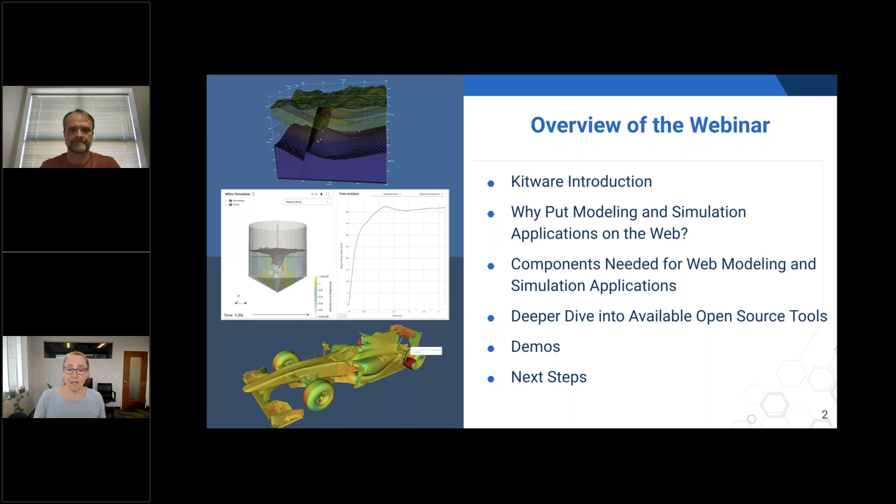So Kitware is a software and AI research and development company. We have about 200 employees, across our offices here in the US and over in Europe. We've been around since 1998, and we are committed to open source and open science. We're proud to be a 100% employee-owned company. We're also a highly collaborative company.

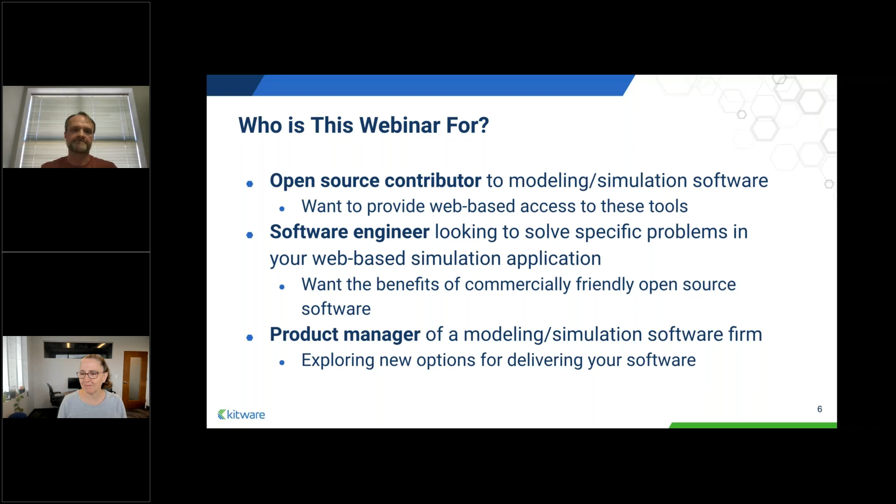First, I want to start by telling you what I mean by modeling and simulation. I'm using these words, which are overloaded quite frequently, in the context of running computer software that models some kind of physical phenomenon in the real world. By modeling, I mean the creation of data structures, such as meshes that are needed to discretize the mathematical model that describes the physical phenomenon, then the definition of parameters that might also govern that phenomenon. By simulation, I mean the process of computing the modeled phenomenon in a way that produces data that reveals how that physical phenomenon has evolved.

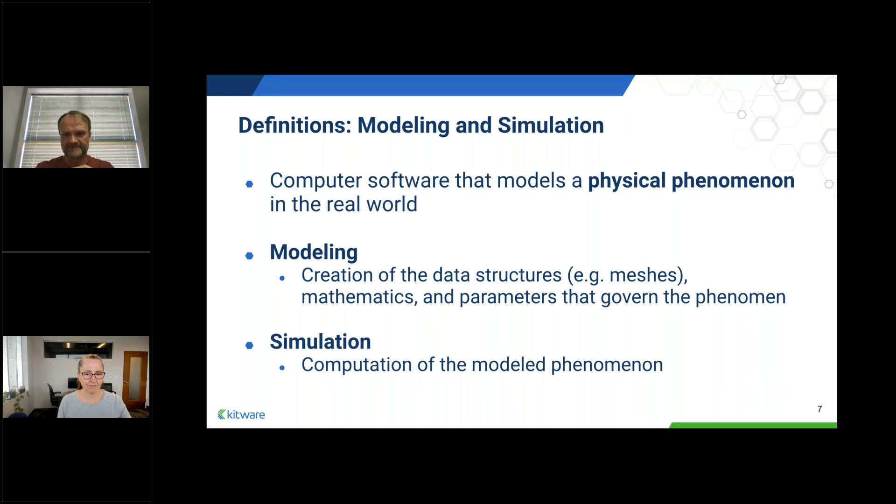So in practice, modeling and simulation is carried out as part of a workflow. This is just one example of a modeling and simulation workflow. On the left, we have model creation and domain definition.

This can involve creation of geometry that represents some physical objects in the world, as well as an embedding in which those objects interact with some external components. For example, we might have a model of an airplane wing that interacts with a volume of air flowing around it. To the right of that, we have discretization or meshing.

In many simulations, this step is critical for getting accurate results.

Third in line, we have parameter specification, which is where you specify input parameters that affect the evolution of the physical phenomenon. This might involve, for example, setting boundary conditions or defining things like Reynolds number in a computational fluid dynamics simulation.

Once everything is set up in terms of having a mesh, if it's required, and the model parameters are set, the simulation process can begin. This is the actual computation of the model and the simulation results that we are running.

Finally, to understand the result of the simulation, we have a post-processing step that involves analysis and visualization of the data that's been generated by the simulation.

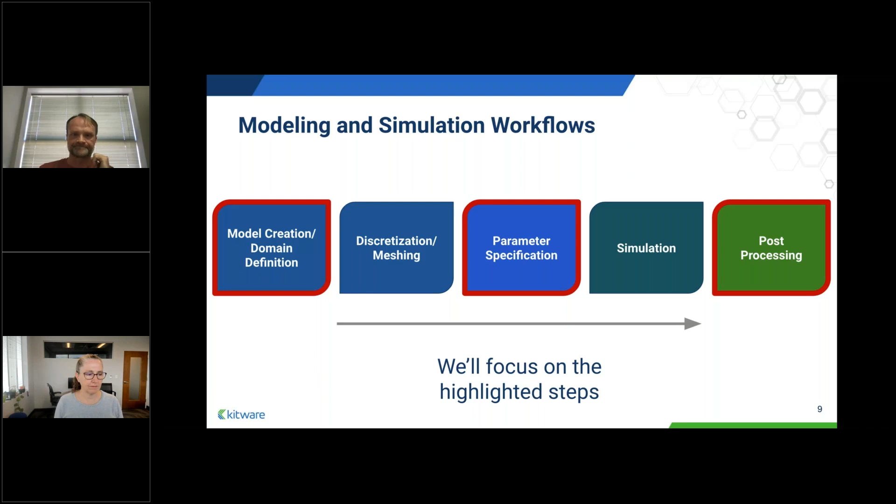So when I say, or what the title of this talk is about, making modeling and simulation widely available on the web, I want to clarify what I mean by that.

I'm not talking about a web application that is something like a remote desktop application or a thin client that simply provides a window into some remote system where the usual desktop software is installed.

Now that's a fine model and has plenty of benefits. In fact, a number of software simulation software providers offer such services, and they work well. But this is not the model I'm talking about today.

Instead, I want to talk about native web applications that are delivered from a web server to your web browser. Now, web browsers these days are very capable platforms for software application delivery. They offer advanced user interfaces that are as good as, and in some cases even better than, desktop applications.

You might be familiar with Microsoft's suite of Office applications that are available online. Adobe offers their tools such as Photoshop, Premiere, and Illustrator online as well. And this is a great platform to offer those tools that have historically been desktop applications.

You're probably familiar with other services that you use every month to do banking or pay bills. Those are all web applications with usually fairly nice interfaces. These days, there are a lot of software tools available that make it routine for web developers to build attractive user interfaces that are perfectly suited to what we're interested in here today, which is modeling and simulation applications.

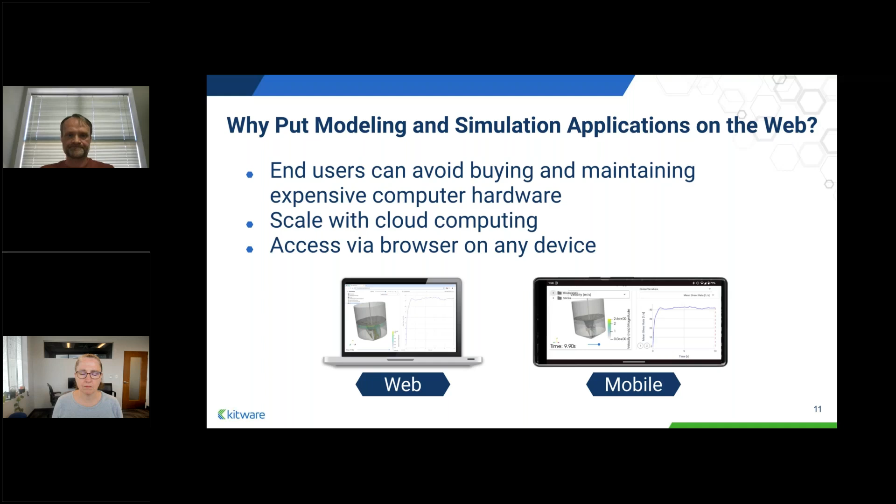There are a few additional reasons to put modeling and simulation applications on the web. Often simulation software consists of an ecosystem of very different executables used together to produce that simulation workflow we saw earlier. These applications can be pretty complex to use by themselves, let alone in the sequence you need to produce simulation results successfully. So integrating them behind a single user-facing application that hides away those details just makes the software easier to use and increases the adoptability of your software by users.

Because people can connect to that simulation software from anywhere on the planet when it's on the web, having that available online also opens up possibilities for easy collaboration. For example, design teams from even different continents can log in to the same website and share models and simulation results among each other quickly and easily.

Putting simulation software online also opens doors to non-expert users who are unlikely to have access to a workstation where traditional desktop modeling and simulation applications would usually be installed. You can even go one step further and make it possible for computational scientists to create curated simulations that have only a few exposed parameters that are meaningful to end users who have other expertise, not necessarily computational modelers. I'll demonstrate such an application a little bit later on. The value of doing this is that it has a multiplicative effect on the value provided by computational scientists within an organization, since they can delegate some of the more mundane but still necessary simulation tasks to others who weren't able to run simulation software easily before.

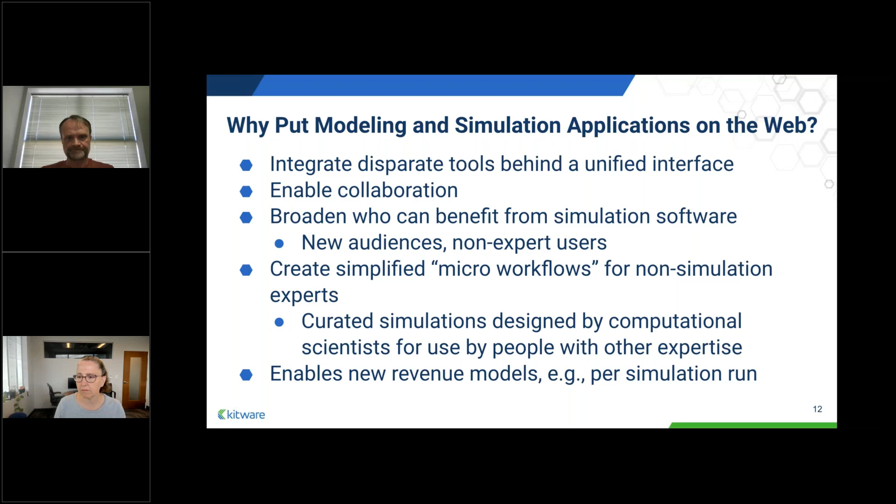So we saw earlier a depiction of one possible workflow for modeling and simulation. What are the components that we need to enable the creation of those workflows on the web?

So first, we need some kind of geometric modeling tools. This might consist of a database of predefined model geometries, or maybe simply text descriptions of a model geometry and how their different objects are related to each other in space, or even full-fledged CAD tools that let you interactively define input model geometry in 3D.

Second, we need some kind of user interface elements. These could include text fields to enter numbers, sliders to specify numbers within a range, checkboxes to turn options on and off, list trees, and so on. Things you would typically find in a simulation program. Web applications use these elements to set simulation input values, for example, in a web-based simulation app.

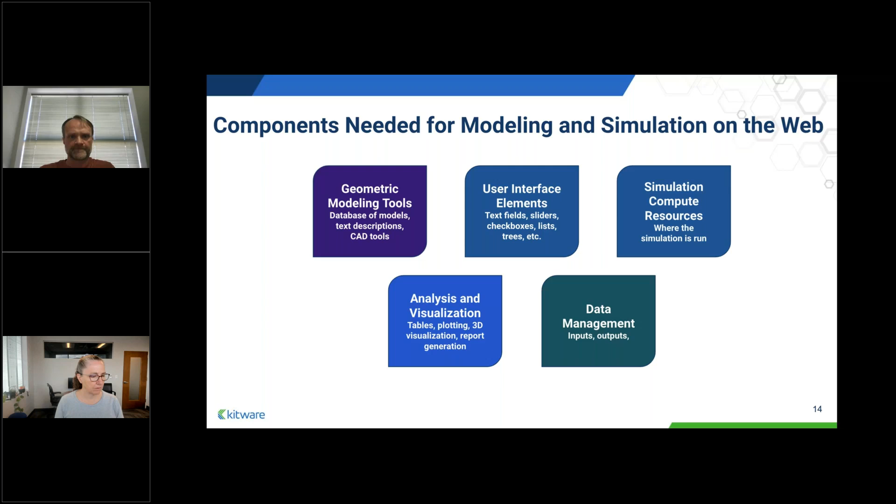Now, there are a lot of software packages available to help with the tasks I just described. As a company that specializes in open source software development and support, Kitware recognizes and promotes the value of using open source software to aid in the development of your web-based modeling and simulation applications. Many others do as well. Let me share a couple of reasons to use open source software.

First, open source software lets you jumpstart your application development. By satisfying a common software need with an existing open source library, you can focus on the value your software provides instead of reinventing the wheel. In addition, there are no costly licensing fees. A lot of open source software is licensed in a way that lets you use it in commercial offerings without owing any kind of licensing fee.

Open source software also helps you avoid vendor lock-in. While there's a labor investment required to use any open source software library, there are no other real financial considerations that have the effect of keeping you locked into using that software. You can freely swap it out for another open source library that does the same task.

Open source software also has the benefit that bug fixes and updates are contributed by others who use the software, and you benefit simply by updating for free when a new version comes out. You also have the option of contributing features and bug fixes back to the open source project so others can benefit. It's a real win-win situation.

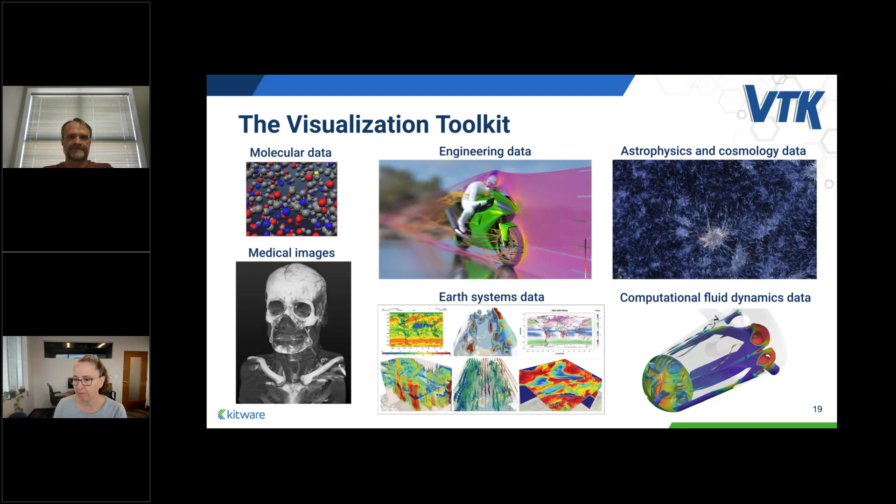VTK is a software toolkit for visualization. It's written in C++ and runs on Linux, Mac OS, and Windows. It also has language wrappings for Python, Java, and C#. VTK is open source and has a permissive BSD style license, which means it can be incorporated into commercial software products. VTK is able to work with several different user interface toolkits, including Qt, MFC, X11, macOS Cocoa, and several Java toolkits.

But wait, I just said VTK is a C++ library, and really it's intended for traditional desktop software. So how do you use it for visualization on the web? Well, there are two different approaches available at this time to use VTK in web applications. One is with the JavaScript library called VTK.js. The other is with VTK C++ code compiled to WebAssembly. We call the second approach VTK WASM, where WASM is an abbreviation of WebAssembly.

All right, so we have these two different approaches. What are the similarities and differences between them? Why do we have two different approaches?

Both are libraries that enable rich 3D visualization on the web. They provide similar functionality in terms of the core scientific visualization capabilities that they provide.

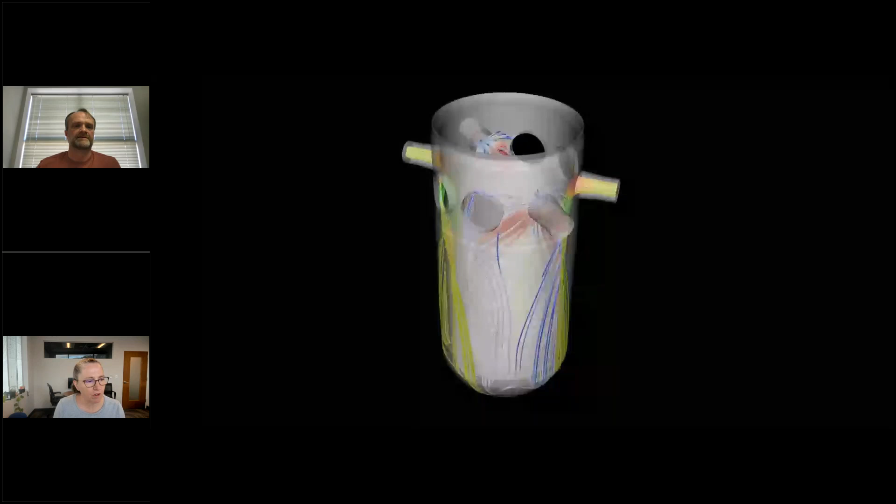Your demo might cover it, but I remind everybody that demos through a webinar interface sometimes seem choppy when they're perfectly smooth to Cory.

The question is, what kind of rendering performance could you expect to get out of a web browser? Most recently, we've been developing in the VTK WASM interface, which I'm talking about next, some optimizations that let you render tens of millions of polygons, 10 to 20 million polygons at interactive frame rates, so 15 to 30 frames per second.

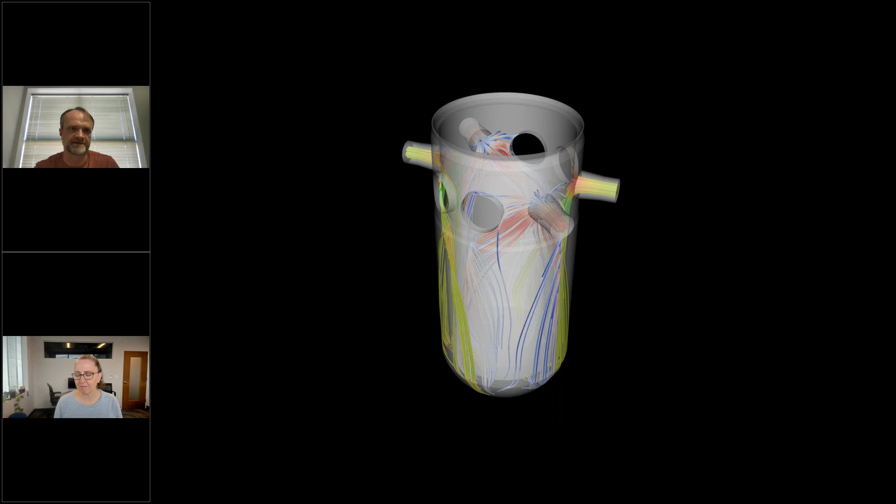One of the limitations we run into using that approach is, or has been until recently, a 32-bit memory address space. So you can often run out of memory before you run out of rendering performance or how many triangles you can render. That's been alleviated, and 64-bit address spaces are now available. So we can really push that. On the order of 20 million polygons at interactive rates is quite possible.

Thanks for that question.

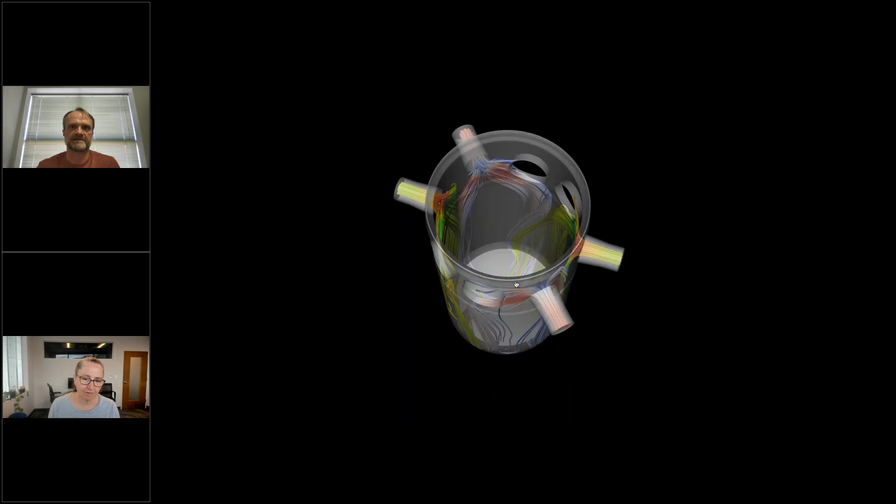Here is an example of a visualization. This is just pre-canned, not interactive other than I can slowly move it. This is very interactive on my system, but as Lisa mentioned, it's subject to compression and is a little bit less smooth on your side.

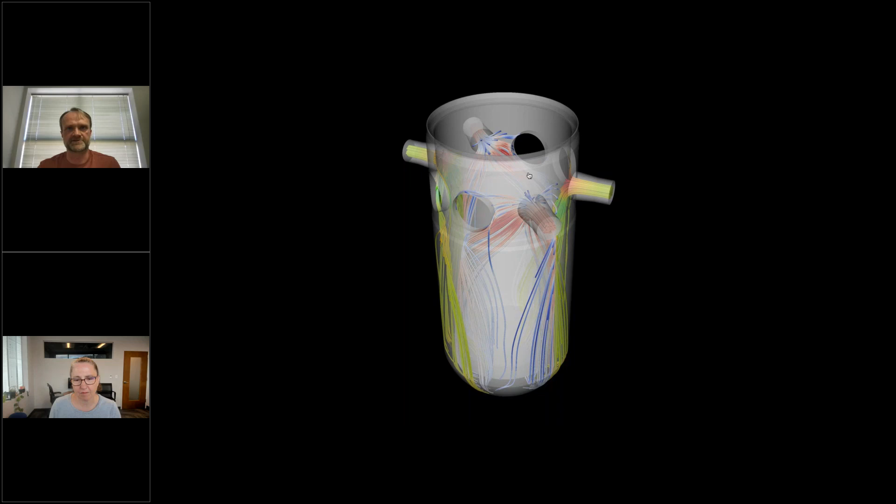But it basically shows a couple of things. We're showing geometry here in a mixing vessel application. This vessel is set to transparent, so you can see that transparent compositing is done in a correct order. We have pseudo coloring on these streamlines that are displayed here. So, classic example of scientific visualization here, and this is VTK.js.

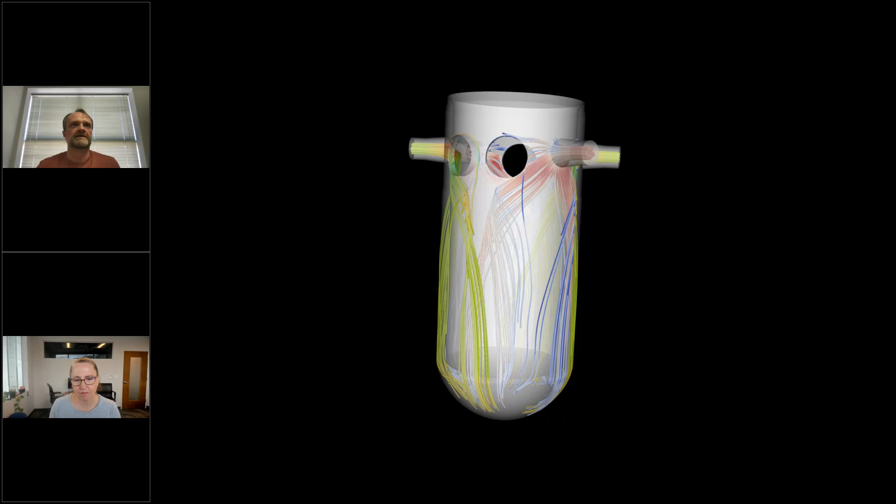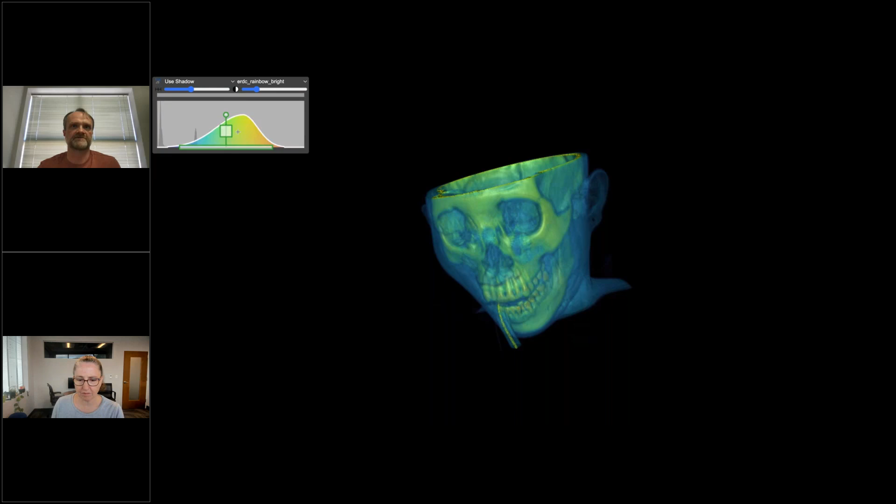Next, I'm going to show volume rendering. This is a medical data set. Volume rendering is a way that lets you see through 3D data. There's a transfer function, shown in the upper left here, that modifies how data values are mapped to both color and opacity. As I'm adjusting that, you can see the results. It might be a little subtle, but you can say focus more on bone than flesh as I move this transfer function around, and this is all happening and rendering very quickly.

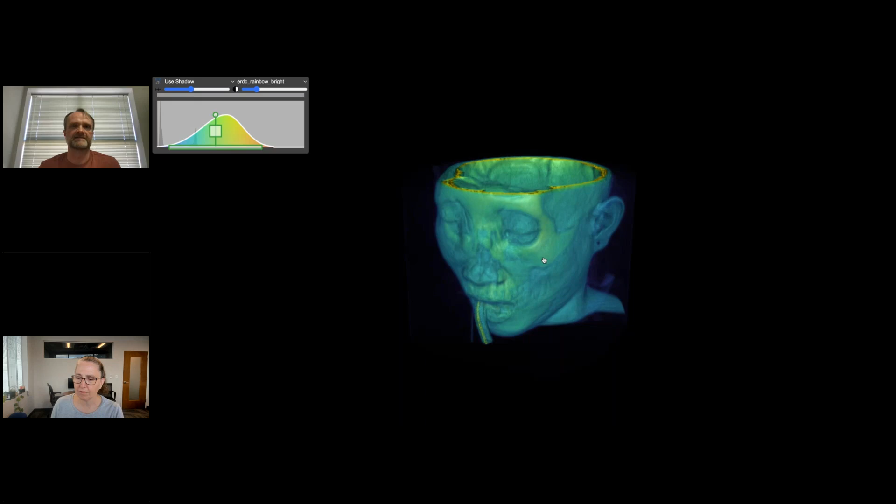This is a VTK.js volume renderer. I'm still, to this day, amazed to see this work so smoothly on web browsers, especially on my phone when I look at that. I never imagined the day when we'd have volume rendering on phones work just very smoothly. So that is a quick demo of a couple of the capabilities of VTK.js.

Next, I'm going to tell you about VTK WASM. VTK WASM consists of VTK components from the C++ VTK original library that are compiled into WebAssembly. Sorry, I've been saying WASM - WASM is just a shorter way to say WebAssembly. So this C++ VTK code is compiled into WebAssembly, which is a binary instruction format that can run in a virtual machine in your web browser.

Emscripten is the compiler toolchain that allows you to do this, and it's pretty neat because it will take those OpenGL calls in VTK and transpile those into WebGL2 calls. A cool thing about this is that that same C++ code that you can use to generate 3D images in a traditional desktop application, or say if you're doing server-side rendering that I described before, can be brought into the web browser and can be used to do 3D rendering right in that web browser.

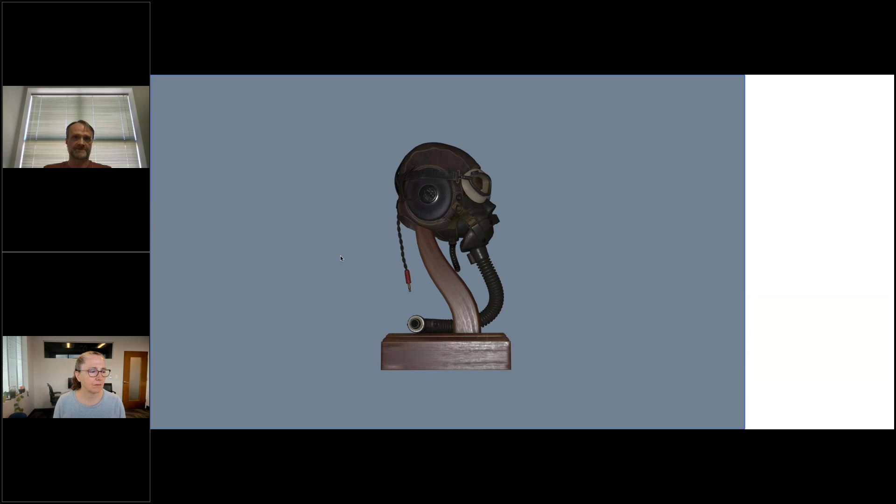So this isn't really scientific data, but I thought it was a cool example because it just shows you that C++ VTK code is running in the web browser and lets you have nice things like textures, nice lighting effects. You see how the metal shows up, some physically based rendering capabilities. So it's low on the scientific merit, but it is a good example of what rendering is possible in the browser. And remember, this is a C++ VTK example running. It's not in VTK.js or some other library.

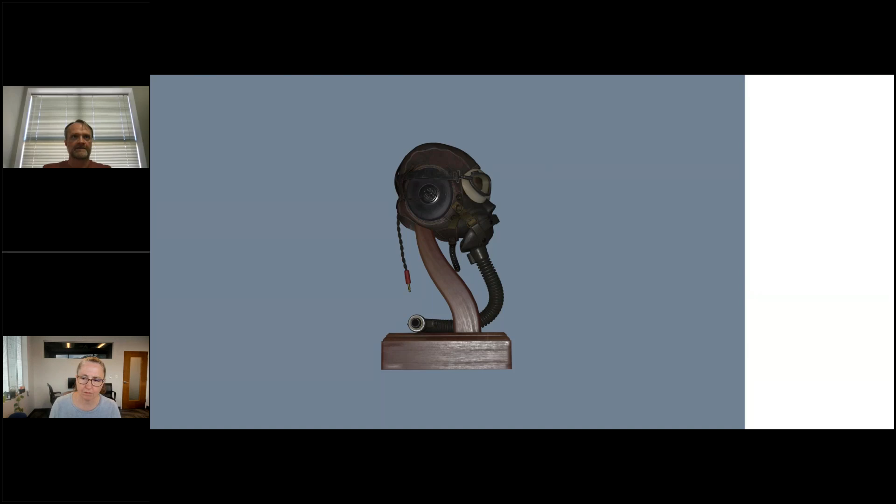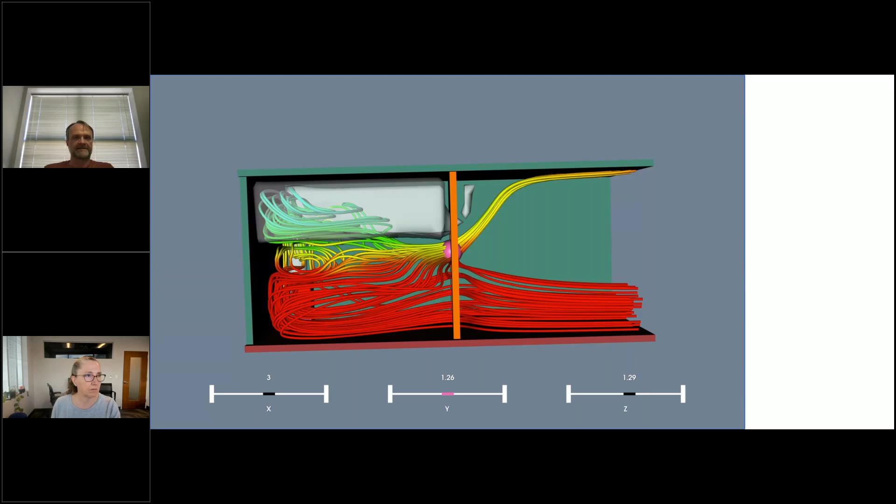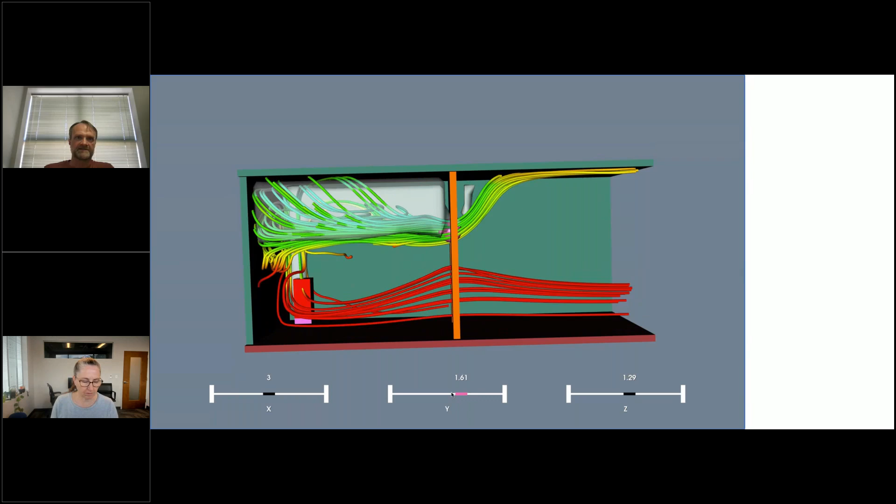Here is a more relevant example. This is, again, a VTK C++ application, from the VTK C++ examples page, that shows some simulation of a fire and airflow related to that. So you notice I'm pulling this user interface element that's actually rendering right into the 3D scene. It's a slider. I'm moving the pinkish sphere up and down, and you'll see that the streamlines are changing. This pink sphere is the seed point location, and all the streamlines are coming out of it.

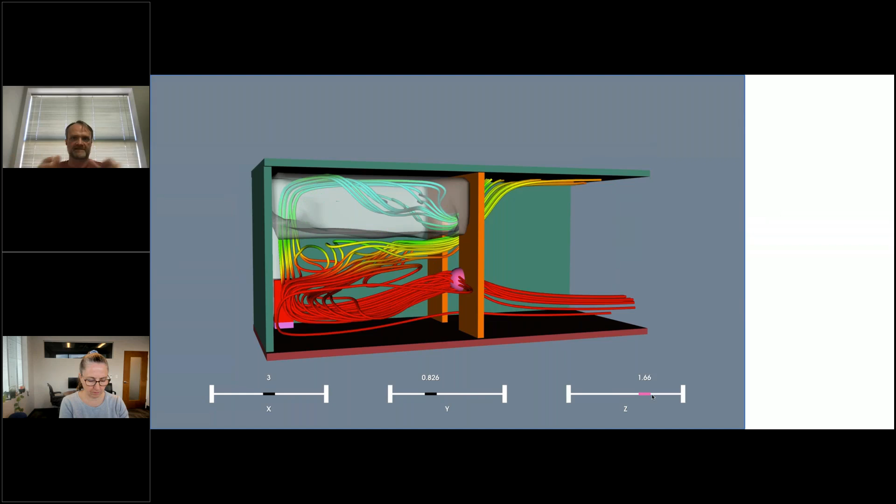The thing to realize is that this is all being computed right in the web browser, the streamline integration included. It's all contained in this one application running here. There's no server on the back end. So it just gives you an idea of some of the power of what you can do with native VTK C++ compiled into WebAssembly and exposed as an application this way.

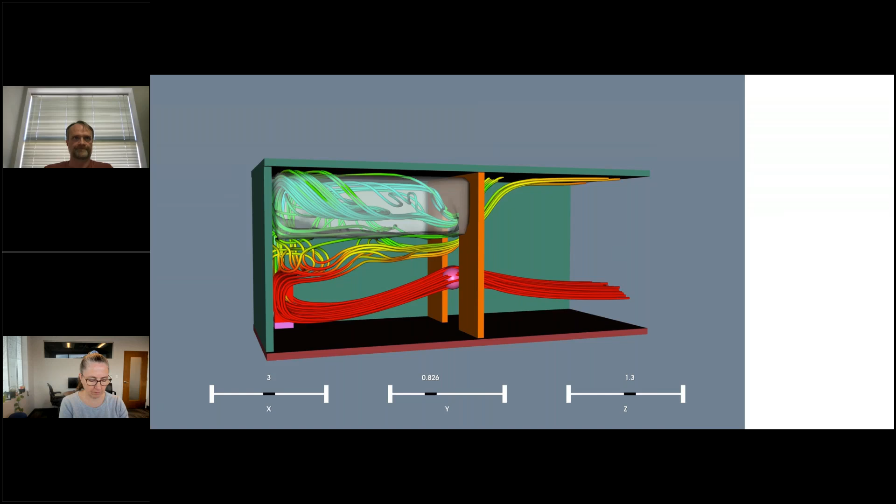All right, I think this is a good time to jump in with another question that came up. Sure. Somebody wants to know if you can just write your web application in C++ and compile it to run on the web. Yeah, so that's partly true.

So if you just change your compiler to Emscripten, that takes you part of the way. But there's still some JavaScript wrapping you need to do to basically start that WebAssembly code running, and then provide things like the user interaction you saw when I click the mouse and drag it around to do the 3D. So it's not necessarily that you can just take a stock VTK program and put it on the web. There's a little bit of JavaScript to write, but the 3D rendering components are fairly straightforward to compile.

Thanks, Cory. Yeah, great question. Thanks.

So we covered those two different approaches. I expect to see more and more progress from VTK WASM, and meanwhile VTK.js is going to continue to be strong as well and let you make compelling visualization applications on the web using either one of those.

So next I want to turn my attention a little bit to a nice tool that's come out in the last couple of years out of Kitware here. And we call that tool trame.

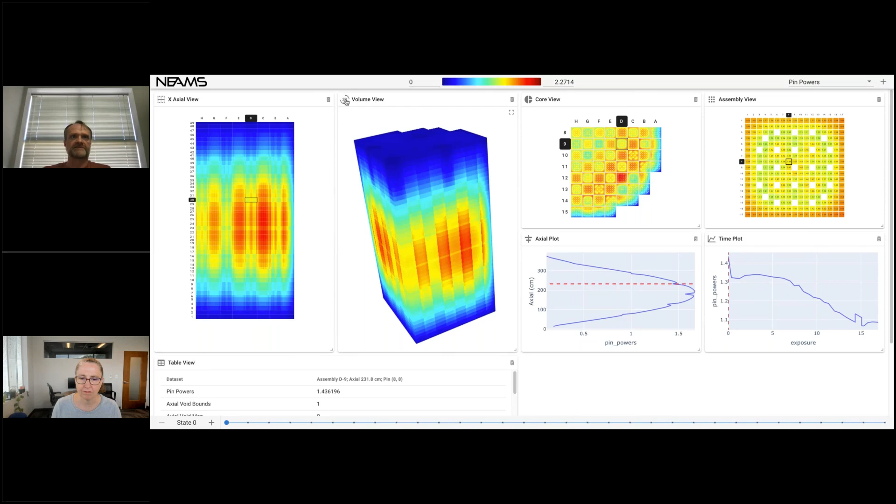You can switch different view types of the data. You can rearrange these components, and this is all courtesy of Vue, taking care of that for us. You can switch which things you're looking at using the menu interface here. This is a very nice application for understanding this kind of data.

There's also different time steps available for visualization. You can switch to those with the slider bar at the bottom. So this gives you an idea of all the user interface elements you can find, all in Python, all with trame, with most of those details, any kind of JavaScript or anything, hidden from the developer. They just don't need to know that in any great detail.

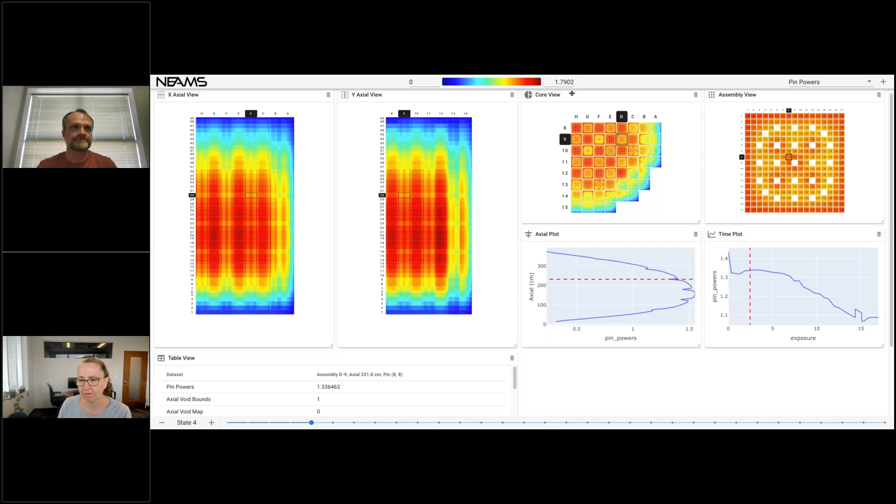Another visualization platform you can use for 3D rendering on the web that you might consider for modeling and simulation applications is ParaView. ParaView is definitely a desktop application, but it also runs on servers. It's built on VTK and adds parallel data processing capabilities. It's targeted for use on HPC systems.

It can be run in a client-server configuration, with the 3D interactive display on the client side, like we've been talking about in the browser, and the server running on a system that has access to the file system where all the simulation output resides. That's often the same system that ran the simulation.

Because it's a VTK-based application, trame can be paired with it to do web-based 3D visualization. You can actually have a ParaView server running on an HPC system, serving data to the ParaView client, and then a trame application interacting with that client to generate 3D data or grab geometry and display it in your web browser. So if you've got large data or you're using HPC systems, this is a possibility.

Next, I'd like to put this all together in a kind of capstone project, and show you an example of a web application that provides end-to-end modeling, simulation, analysis, and visualization. This application is called ArrowFlow, a web application offered by Kitware that provides end-to-end simplified workflows for the MStar CFD simulation code. I'm going to get that loaded up here.

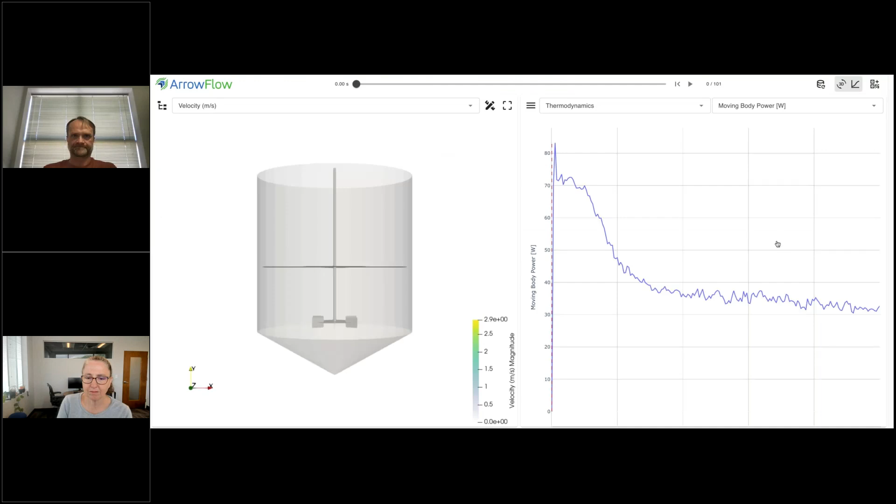This lets you pick a model and set a couple simulation parameters, like you see here, and we're going to load an existing run. I could run it live here, but it takes a little bit of time to start up the simulation, so let's load an existing run. This was pre-computed, but if you were starting a new run, you would see this view, and you would see new time steps come in as they're calculated.

Up at the top, we have a slider that we can play through the simulation over time. You can see the liquid surface starting to move as this impeller is rotating around. Now, if I stop it here, we also have a plot on the right that shows different quantities.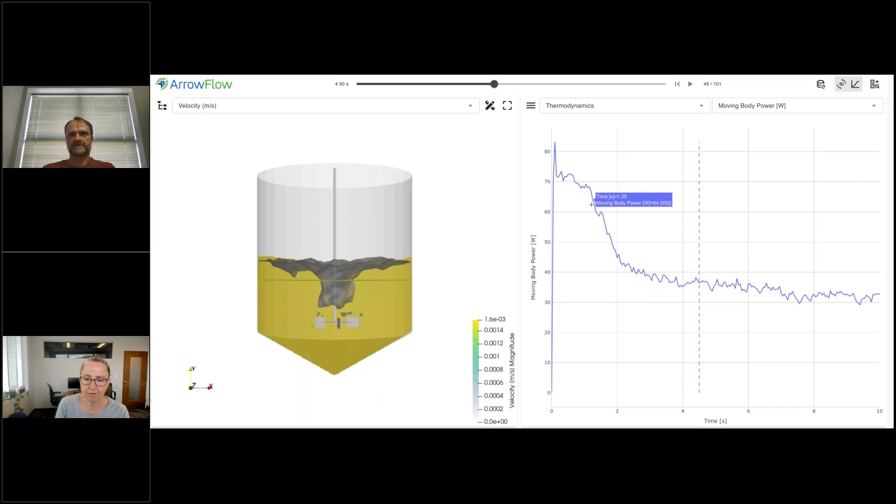In this case, it's a quantity called moving body power. But we can look at a number of other items in here too, like the kinetic energy of the fluid.

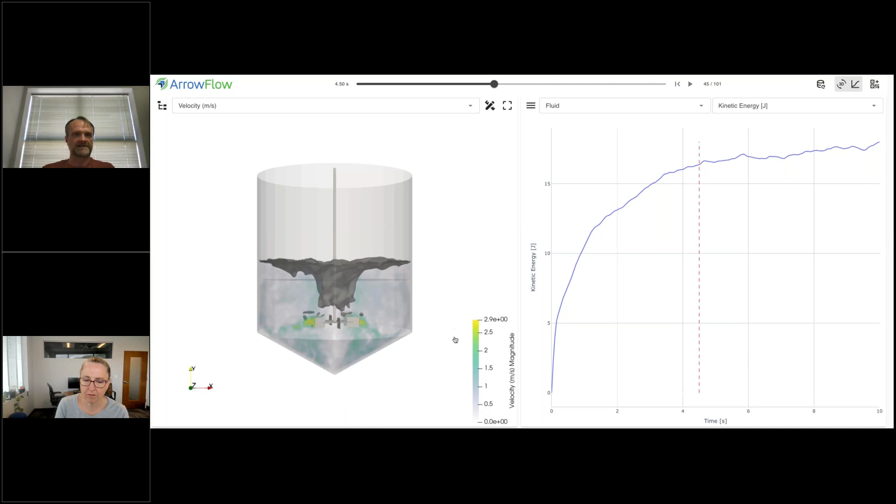If I adjust some of the simulation or visualization parameters, I can see velocity magnitude of fluids in this 3D view. Now, all these images are being rendered on a server located, I believe, in New Mexico. I'm in North Carolina, so it's across the continent, and I'm getting pretty interactive response here.

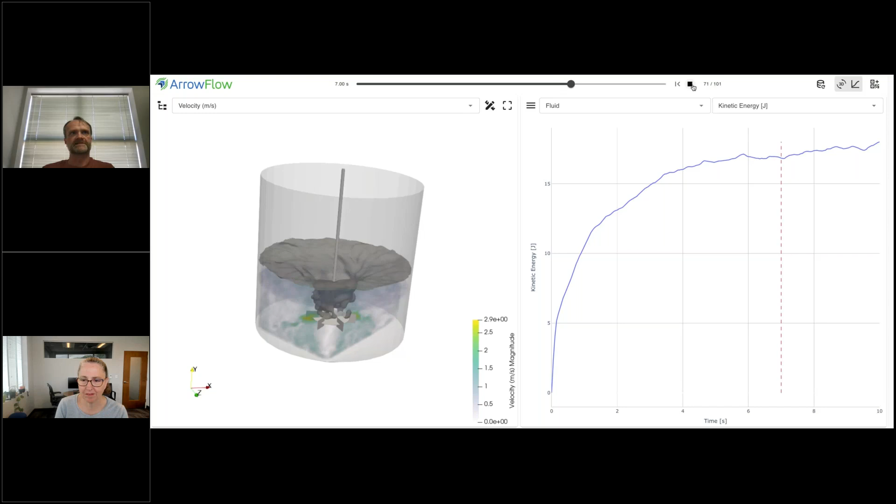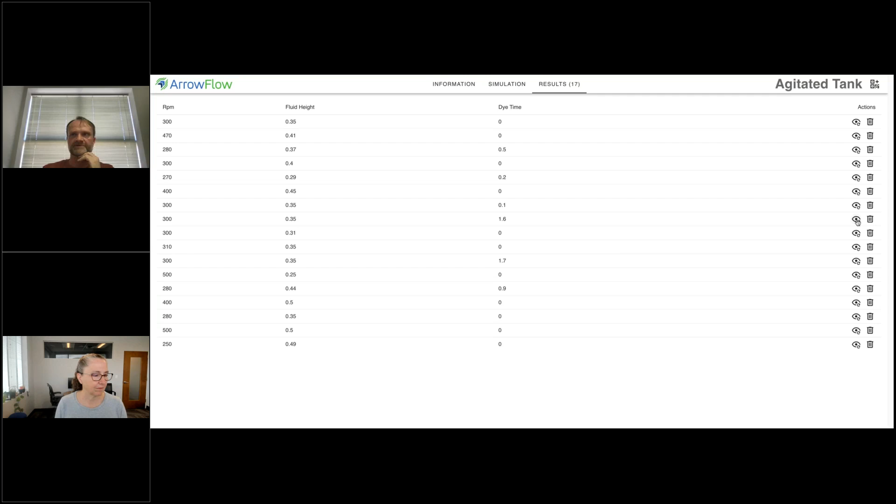But we can watch this process evolve, do some analysis, make some conclusions, and then start over and run a different set of parameters. Here's a table of all the results, or all the runs we've made before, listed by different parameter combinations. You can load them up with these icons on the right here, or delete them. So it's a nice compact application that gives you end-to-end modeling from problem setup to post-processing.

And that really encapsulates the idea I'm trying to convey in this webinar. Okay, so wrapping up here.

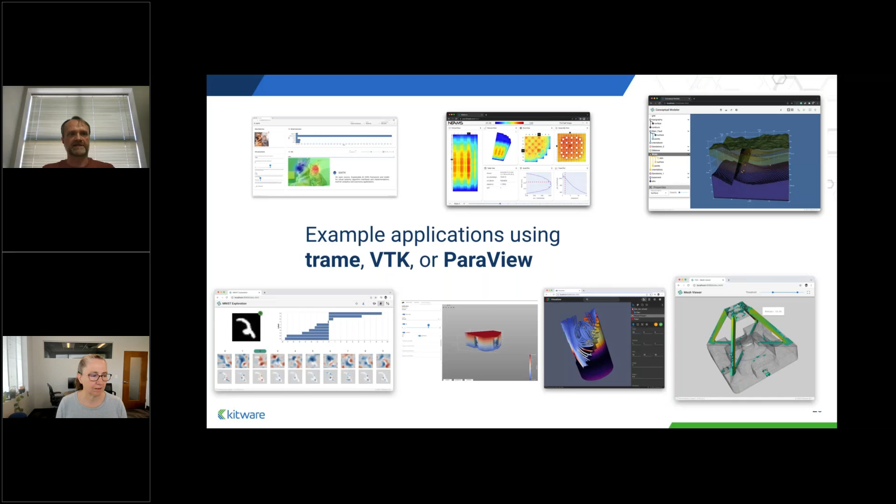Now, where does Kitware fit into all of this? We contribute quite heavily to the open source software tools that are useful for modeling and simulation on the web, especially on the post-processing side and even on the pre-processing side.

So it includes the tools I talked about in detail today, the visualization toolkit, trame, ParaView. And I haven't mentioned too much, but we have a whole data analytics team here who specializes in data management, and they have a framework called Resonant that they can use to make data archiving and data handling basically a file system to store simulation results and input.

So we have a lot of tools available and a lot of expertise in how to use them and put together the different tools into modeling and simulation applications on the web.

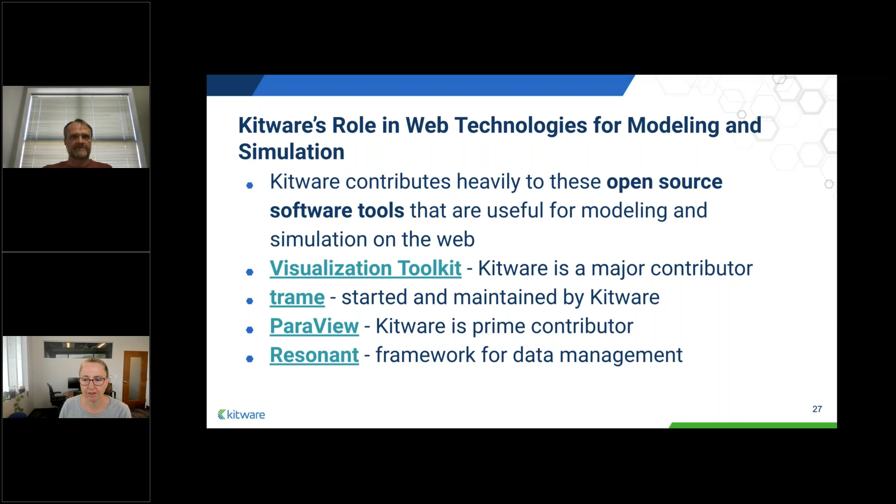So lastly, I'd like to let you know that Kitware can be your partner if you decide to pursue putting a modeling and simulation application on the web. First of all, you can go check out these tools: VTK, VTK.js, and trame. Those are all freely available in open source to use, with licenses that let you use them in commercial offerings.

If you need help, there are public forums where you can ask questions for VTK, VTK.js, and that includes VTK WASM, or ParaView, or trame. If you need more help than that, Kitware offers professional services, including rapid response technical support, where we help you get past thorny technical issues or questions you might have. We can do custom web app development for you, either as part of your development team, or we can do the entire project for you.